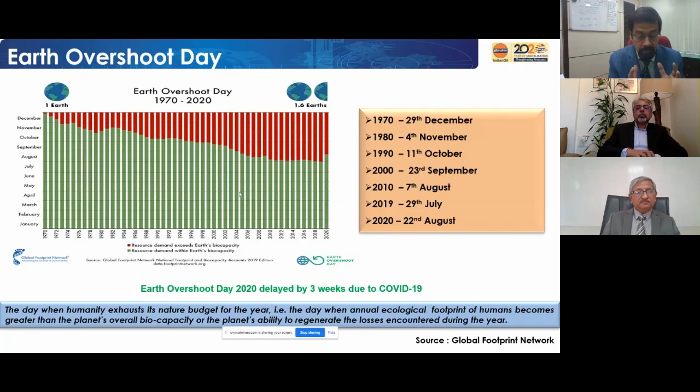Ultimately your cost exceeds your budget. So within a matter of say 21 days or 32 days, you spend everything. So for the last 1 week, you don't have anything to spend. So Earth is also having a capacity, and this resource demand exceeding Earth's biocapacity is the culmination of our development hunger, the thirst for getting more and more.

This is pushing us very hard. You can see, in 1970, if you take a calendar year, the whole resources from 1st January 1970 to 31st December 1970 - up to 29th December, Earth could support us. The remaining 2 days we have to borrow. Borrow means there is no other planet, so we have to exert this planet, we have to squeeze this planet.

Similarly, from 1980 it came up to 4th November, 1990 to 11th October, 2000 to 23rd September. See, it is shortening, that means we are consuming much more than what Earth can provide to us as mankind. An interesting thing happened after 2019, on 29th July - that means to survive, we need 1.6 times of an Earth to maintain our supplies, to maintain our livelihoods.

Now 2020, a very interesting thing happens - you all have the answers. This is the COVID diet, whatever happened during this period. Earth became totally silent, all activities got paused. So 29th July, which was last year, now it is 22nd August - that means it's almost 3 weeks' extension COVID has given.

That yes, you were living, otherwise you could have landed a month back, at the month of June, completely exhausted. But it has been pushed to 22nd August, that means we get some extra time to survive. So, with all the negatives of COVID, it's a big positive because Earth got to take some rest and recharge itself - the Mother Earth recharging - because the way we are torturing Mother Earth, it's an indication of that.

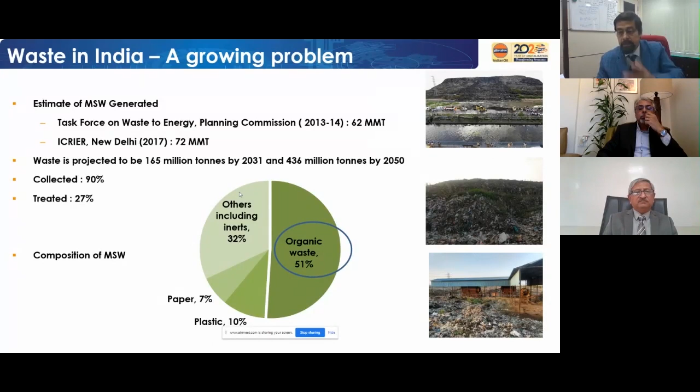You can see the heaps in the photo, which is the waste we are throwing. Every household, every individual is throwing waste every day.

Sewage treatment waste is another waste we are getting. Data shows total urban sewage generated is 36,000 million liters per day, and there are 816 sewage treatment plants in the country. We are treating around 23,000, and about 50% of the STPs have digesters for biogas. So these producing facilities are available, but a lot of work is needed to revive them and make this productively used.

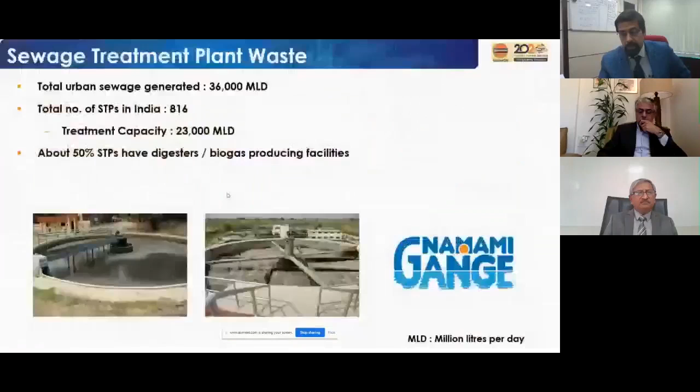Namami Gange is one area where they are working on this.

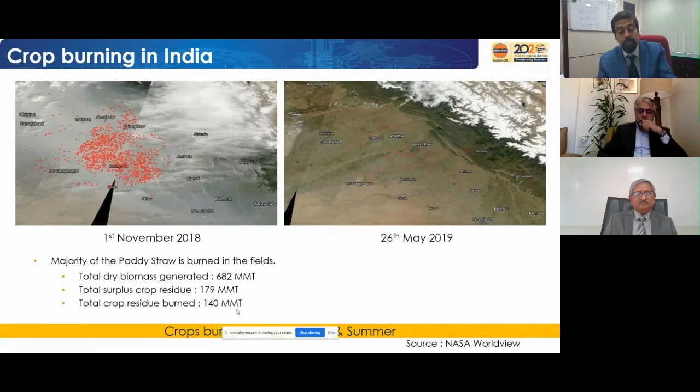Total dry biomass generated is 682 million metric tons. Surplus crop residues are 179 million metric tons, and out of that, 140 million metric tons are being burnt every year. Just imagine the amount of pollution coming out. Instead, if you can use it productively, you can really generate energy. We'll come to that later.

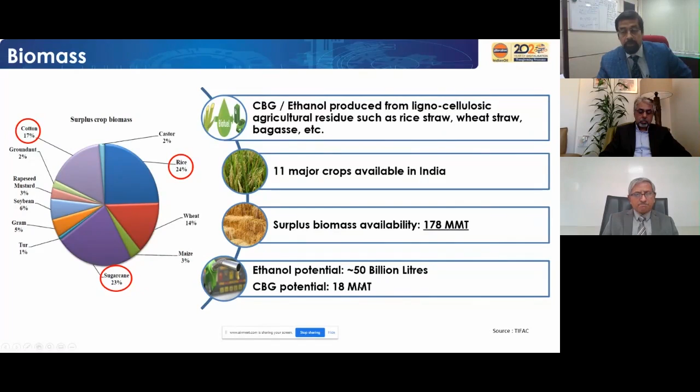Coming to option 1, we can see the compressed biogas option, which has become a very handy and path-breaking initiative by Government of India. Basically, this is methane mixed with carbon dioxide and H2S.

This contains CH4 at 50 to 60% level. Then this is enhanced, purified, and compressed. This compressed biogas contains methane over 96%. Then it is sold as automobile fuel or for industry - both ways this is possible.

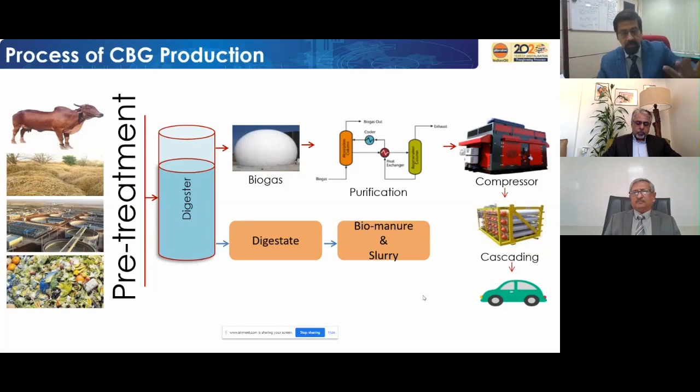And at the bottom, this is very important - the digestate, which is biomanure and slurry. This is also a very useful fertilizer, produced as a byproduct. So these three products - biomanure (solid), bioslurry (liquid), and compressed biogas - three products are available from this. The whole waste has been converted to valuable products.

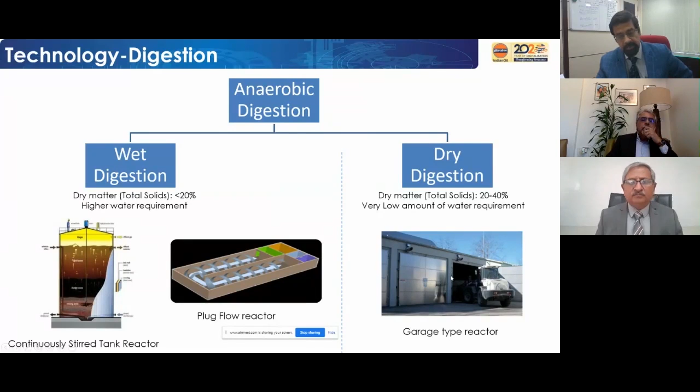This is the technology for digestion. Anaerobic digestion is taking place. There are wet digestions, two types: CSTR, which is continuous stirred tank reactor, and plug flow reactor. These two methods are widely used. Then dry digestion has a garage type reactor. This has limited use, but in Germany and other European countries this method is also applicable. These are the technologies for digestion.

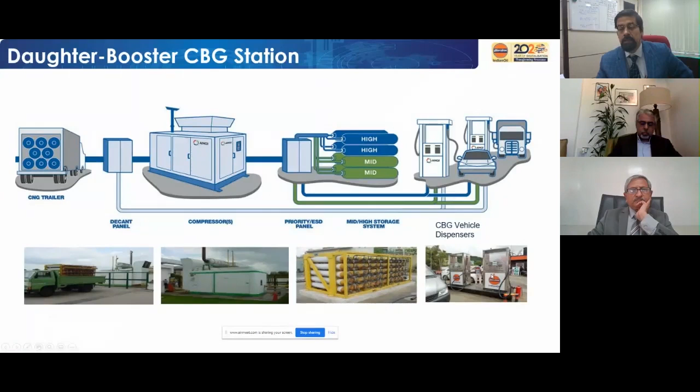If you see this happening in India, which we are starting now - on 1st October 2018 the SATAT program was launched, which stands for Sustainable Alternative Towards Affordable Transportation. Through this, CBG is being spread. We have a target of 5,000 such plants to come to the country. By 2023, these 5,000 plants will be producing 15 million metric tons of CBG and 50 million metric tons of biomanure.

We have fixed the price at 46 rupees per kg plus taxes, which is 5% GST now. This is up to March 2024. After that, this price becomes the floor price, so it becomes the minimum price, and for the next 5 years it remains the floor. Anything over and above this will be applicable based on the market situation at that time. So there is price visibility for 10 years, up to 2029, price has been guaranteed.

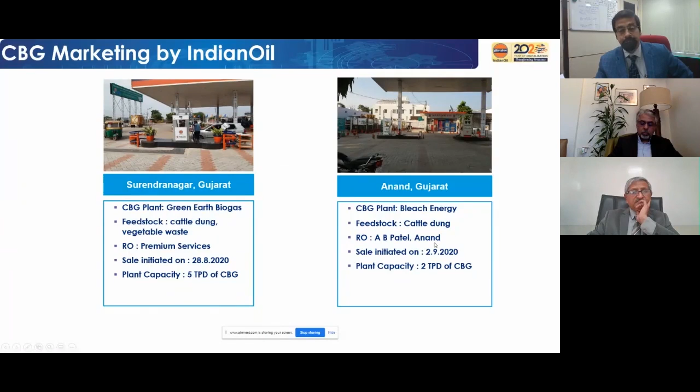So a total of 13 stations have already started, and we are also supplying 2 industrial customers from Namakkal - RK Steel, they are taking CBG and using it for their process.

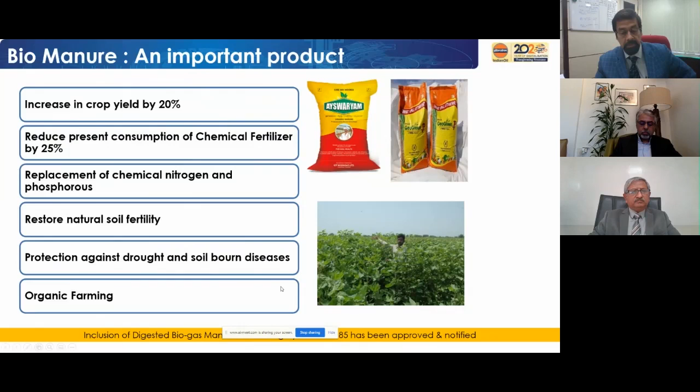This is a very important bio-manure. There is an increase in crop yield by 20%, and it reduces present consumption of chemical fertilizers by 25%, with replacement of chemical nitrogen. This is an organic fertilizer, and Ayswaryam is our brand from IoT Biogas. It has taken a very wide market and market acceptability, and it is leading to organic farming. Fermented organic manure has been included in the fertilizer control order, so this can be marketed without any hitch now.

Another technology option we are trying is waste to energy, through gasification. Today's seminar is on gasification. We are actively working with a technology provider who will handle fresh MSW and also legacy waste, and convert it through the route of syngas. From the syngas we will be able to produce power generation, hydrogen separation, chemicals, and also liquid fuels like ethanol. We have started a demo plant construction in Delhi, and we'll be scaling up once the demo is completed.

Used cooking oil to biodiesel is another area where we are actively working. Every household uses cooking oil, but generally households throw away very limited quantity. In hotels and food business operators like Haldiram, McDonald's, and other units and big hotels, there are restrictions on throwing off used cooking oil after certain use. After second and third frying, we are not supposed to use that cooking oil because it becomes carcinogenic and is not good for health.

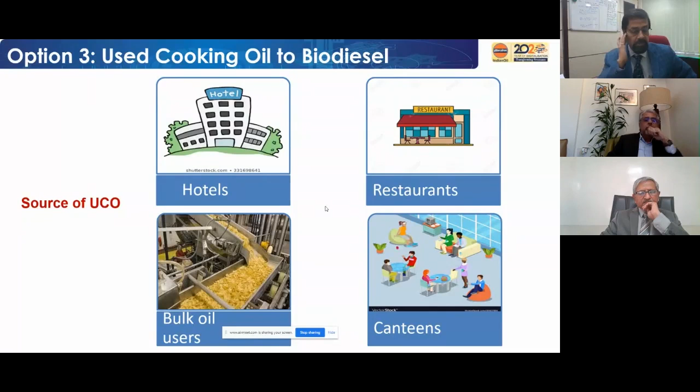FSSAI has stipulated a 25% total polar compound limitation for used cooking oil. If it is more than that, you are not supposed to use it. So that used cooking oil is being collected, aggregated, and used for production of biodiesel. We have been given an EOI, expression of interest, already. We started this in 2019 on the 10th of August, which was World Biofuel Day, and the Honorable Minister inaugurated this program. This is also going on in parallel, and so far we have been getting very good responses from states.

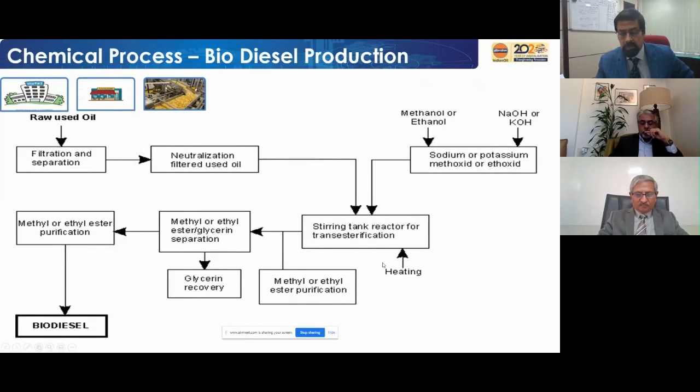This is the process of biodiesel production. It is otherwise waste, because either it goes into a parallel food chain or it comes to disposal through drains and local areas. I consider it a very serious waste, which can be converted for value addition and produce biodiesel, with up to 7% biodiesel blending in HSD carried out in the country. We are a diesel economy, so just as ethanol is blended in petrol to save petrol, biodiesel blending in HSD will give a big boost for replacement of fossil fuel with this type of waste fuel, and will ultimately help reduce imports for this country.

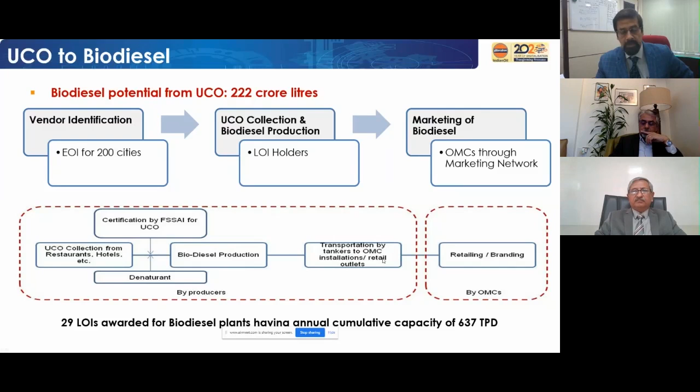So far 29 LOIs have been awarded, with a cumulative capacity of 637 tons per day production of biodiesel. This is the flow chart: 200 cities have been identified, then EOIs through LOIs are placed, and OMCs are taking 100% offtake at a guaranteed price, and we are selling through our marketing network. This is the model, and FSSAI is actively supporting it. Every state has formed a committee. This will also give a boost because the collection and aggregation challenge is already there, and once that logistics is developed, things will move faster. That is the target we are trying to achieve.

Fourth option is cellulosic ethanol, which is second generation ethanol. Here also the biomass, like paddy straw and other biomasses, is being used through pretreatment and hydrolysis, and then fermentation through distillation we can make this cellulosic ethanol. This can also be done through gasification or syngas, using the same process to make ethanol. So we are trying both technologies.

We have our plant at Panipat coming up, around 50% of the work has already been completed. We're expecting by end of next year, 2021, to get this second generation ethanol plant in the country, which will convert 700 tons per day of paddy straw, which is 2.2 lakh tons per annum, into ethanol. As for the gasification route, we are trying this also, and in future we have a plan to convert syngas into ethanol.

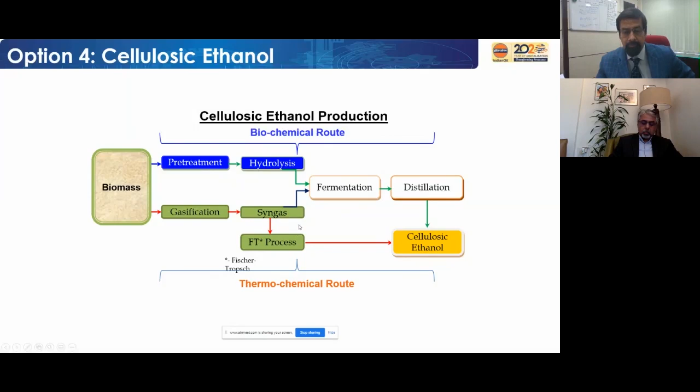Pet coke gasification is one more area our R&D is actively working on. At our R&D center, we have already developed the gasification concept employing pyrolysis and low temperature moving bed fluid bed gasification system. This process is capable of handling various other feedstocks like biomass and its derivatives, lignin, and black liquor, which are major areas that can be converted and add lots of value. This methodology enables segregation of various feedstock depending upon their reactivity and ash content, making the process energy efficient. By processing high ash Indian coal in the low temperature first stage, ash rejection takes place at much lower temperature.

People from a technological background can understand this. This is an area where we are working very seriously because we generate lots of pet coke in our refinery. We got a patent from US, Europe, and India, and a 2 TPD demonstration plant is being set up with our R&D.

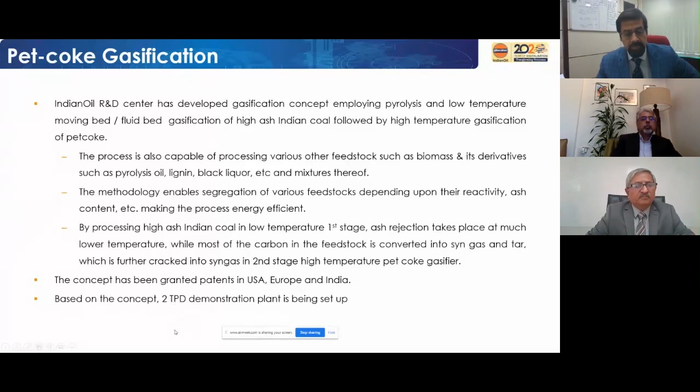So overall, what is the intelligent use of waste? Prima facie, waste is not a waste. I always say there will be a time when you have to keep waste under lock and key, because the market will demand waste and it will have superior value. So that will become an asset for you, and there the circular economy concept comes in.

We have water, we have biomass, we have feedstock. Now we have to ensure quality environment, economic prosperity, and social equity. This is possible with this bio-route: biogas, bioethanol, biofuel, bioenergy. Looking forward to a green India, with all the waste, which is a challenge today, having productive use and enabling self-reliance. Thank you very much, that's all from my side so far.

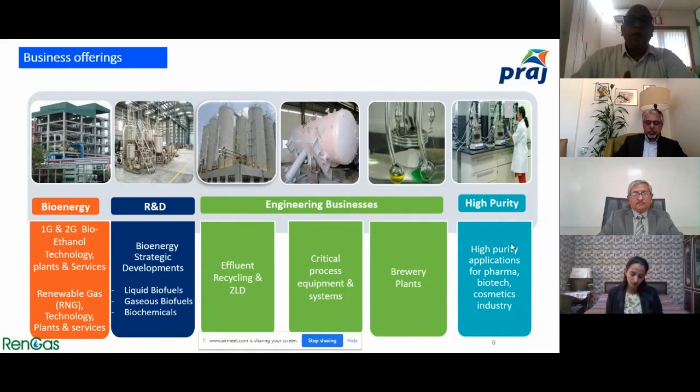We have various business lines, but of course, bioenergy and the research focus around bioenergy plants is the main theme that we have. The rest comprise effluent recycling, critical process. We have a global leadership in biofuels, ethanol and renewable gas plants, and we do everything from feed audit studies up to complete construction of plants, commissioning, and project management along with post services.

This is our R&D center, which is one of the unique ones dedicated to bioenergy, especially using various waste streams and converting them into useful biofuels. That's the theme behind our R&D.

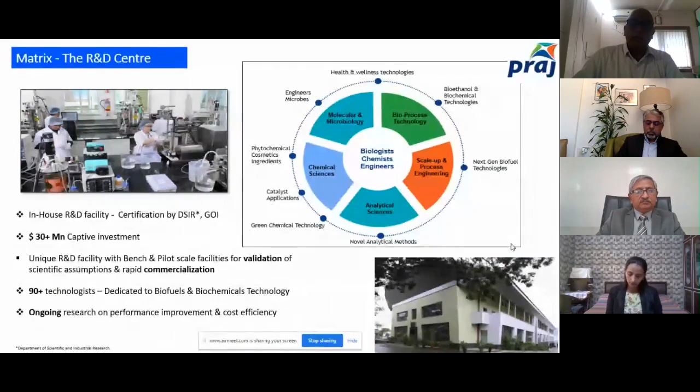Coming to biofuels, which we feel is key to sustainability. If we look at the major challenge today, it's petrol and diesel. Let's be very specific about it. They are the major contributors to carbon and GHG emissions, causing health challenges across the world. Therefore,

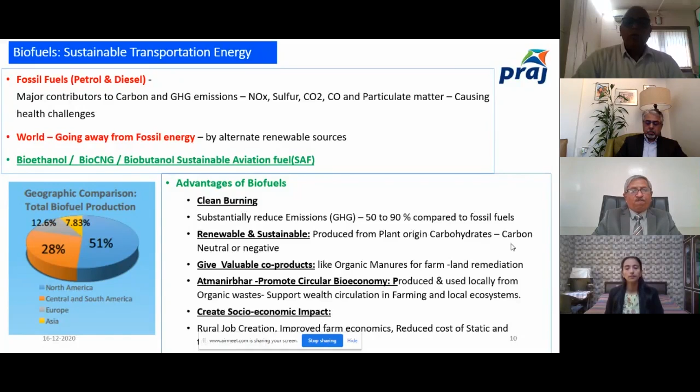every sector, be it vehicle manufacturers or oil companies, wants to move away from it, preferably to much less hazardous alternate renewable sources. These typically comprise bioethanol, bio-CNG, as Mr. Gupta also spoke extensively, and biobutanol, which is a new concept coming up for aviation fuel, SAF, because they are clean burning and renewable. They also give valuable co-products like organic manures. And in India, they are key to Atmanirbhar Bharat, promoting circular bioeconomy as well as having a very good socio-economic impact. So this is the importance of it.

Very quickly, coming to the plan of the Ministry of Petroleum and Natural Gas in coordination with the Ministry of Agriculture. It's very straightforward: blending 20% bioethanol into petrol by 2030, and replacing 15 million metric tons of CNG with bio-CNG or CBG by '24. Very well-defined, lucid and clear targets.

What this is going to do is save almost 10% of our forex oil bill, pumping that wealth back into farmers and the rural economy.

That's critical. And on the other hand, this connects to utilizing gainfully and sustainably the organic waste produced from the agricultural sector like straws, the agro-industrial sector like sugar mill press muds and distillery spent wash, and city waste we all generate through MSW, food waste, etc. If we put all these together and use them gainfully in a systematic way, this target is very easily achievable. That is the key significance of using all this so-called waste.

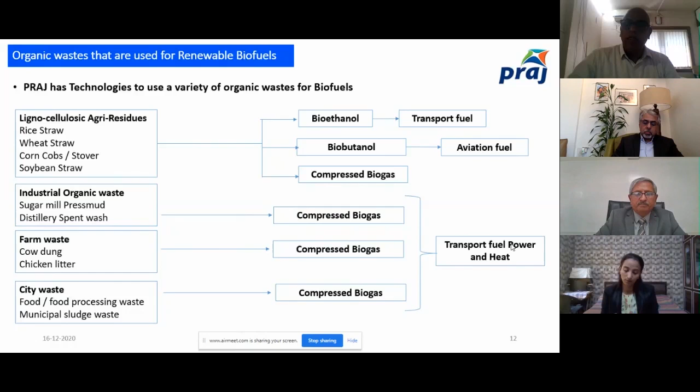So when we quickly look at agri-residues, they are quite abundant, almost to the tune of 150 to 200 million metric tons. These are some of the types - they are cellulosic in nature and need some kind of pre-treatment to extract the sugars. They can be made available around the year because luckily India has a very good combination of 3 seasons for plantations.

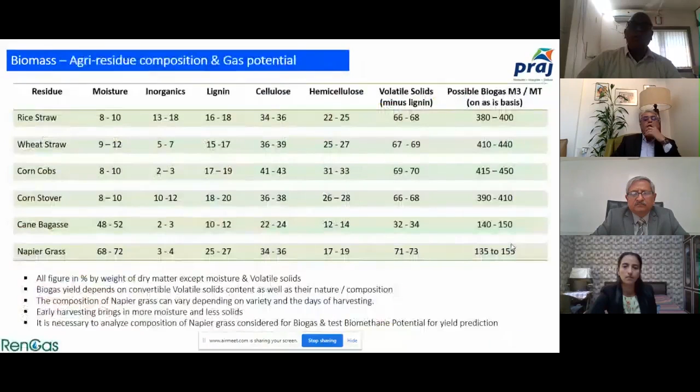So all the time from our farms, this resource keeps on coming as available resource to convert into energy. When we look at their composition, rice straw, a metric ton of rice straw has a potential to give almost 400 cubic meters of gas. And as you can see, most of the other materials are in a similar range.

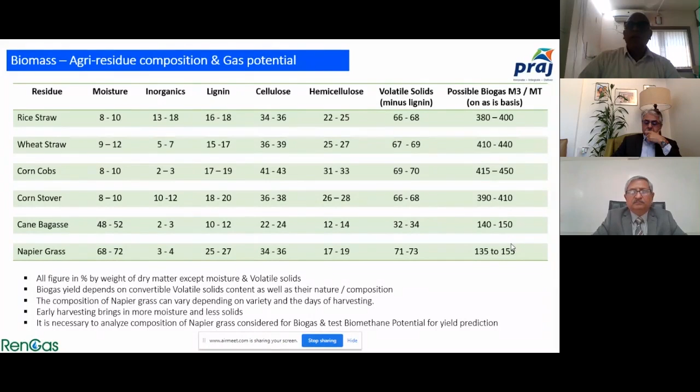This translates into about 150 kilograms of compressed biogas per metric ton, which is a very attractive and viable conversion. What it means is half of the organic matter contained in these natural resources very efficiently gets converted into clean burning renewable bioenergy like biomethane. And that's the significance of it.

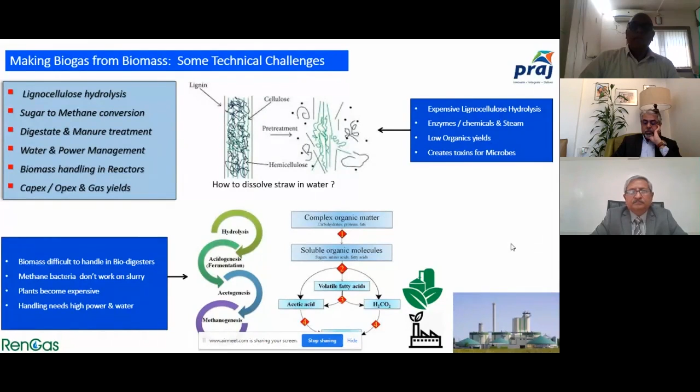Because there are certain technical challenges, Praj as well as IOCL R&D, everybody is working very strongly to resolve them. There are processes which we have developed which use enzymes or microbes to extract very efficiently the organic volatile solids and convert them.

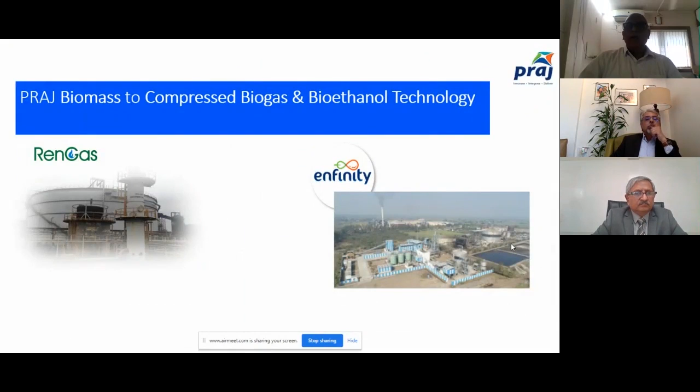Very quickly looking at the two technologies for two vital biofuels: biogas, compressed biogas, and bioethanol technology from various organic wastes.

For waste to CBG plants, we have developed an innovative microbial technology which solves the first challenge of lignocellulosic hydrolysis. As pictorially represented here, a simple microbial pretreatment will dissolve the lignin and take away the cellulose and hemicellulose from this waste, making it available for biomethane bacteria to produce.

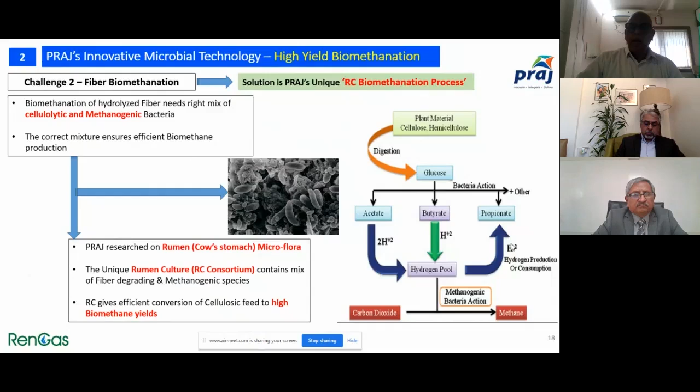The second challenge is how do we convert these volatile solids into biomethane? This is where we have actively worked on rumen culture from cow stomach, where they are able to degrade fiber and produce methane, and that today is available as a commercial solution through our plants. These two combined together can give a high yield of biomethane from this waste.

A third important point is the critical value-adding manure, which is in the form of both solid manure and liquid manure. This has been notified in the fertilizer control order by the Ministry of Agriculture, and it is a very gainful manure replacing use of chemical fertilizers. We also have NOCA certification available.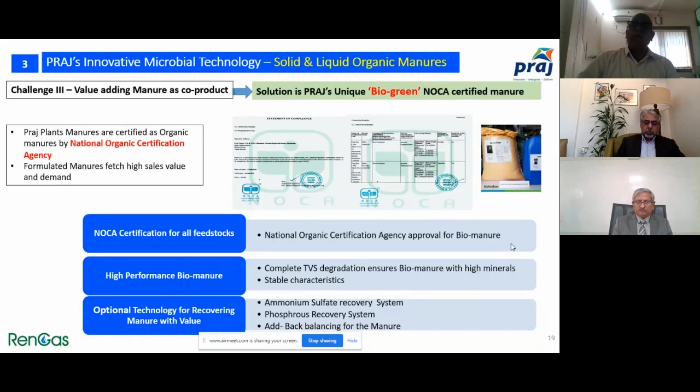Coming to the technology of making efficient biogas, we have collaborated with a US-based company called DVO, and they have a plug flow design system buried under the ground or soil, which works without any stoppage or maintenance for decades together because of its construction and robustness.

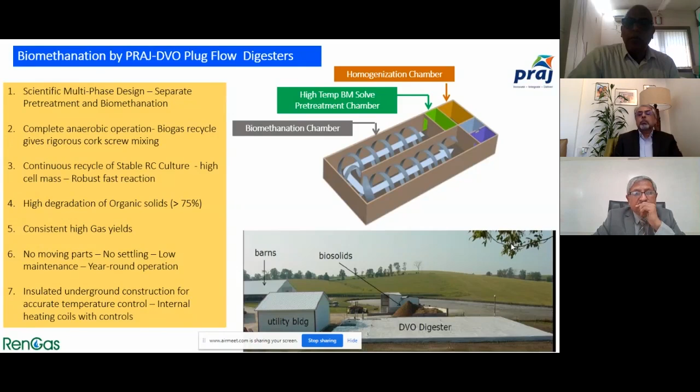We are currently installing 2 plants which would supply biogas or compressed CBG to IOCL. One is coming up in Uttar Pradesh, the other one is coming up in Karnataka, and we are going to do multiple such plants which will be using organic waste.

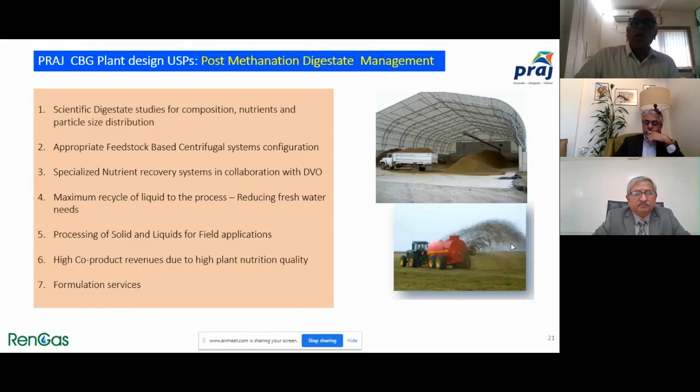The manures are well approved both in Europe as well as in the US, and these are improving the yields and also the humus, making the farming soils rich and not allowing them to go alkaline and go out of farming cycles.

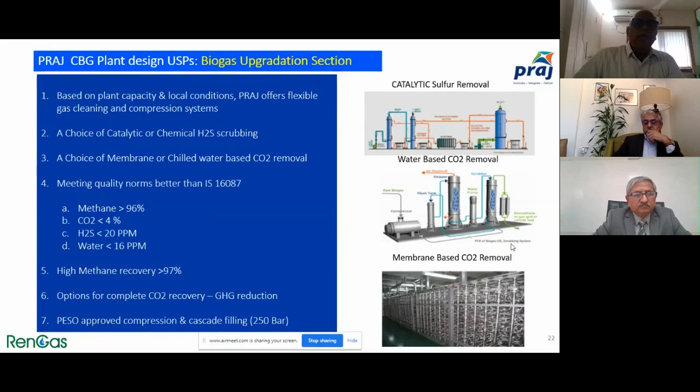Biogas needs to be upgraded to CBG, and we also have commercial solutions there, either membrane systems to remove the carbon dioxide or water-based systems, as well as removing the sulfur. So the desired quality of CBG expected by the oil companies, we can guarantee having methane above 96% and the other impurities well within the limit.

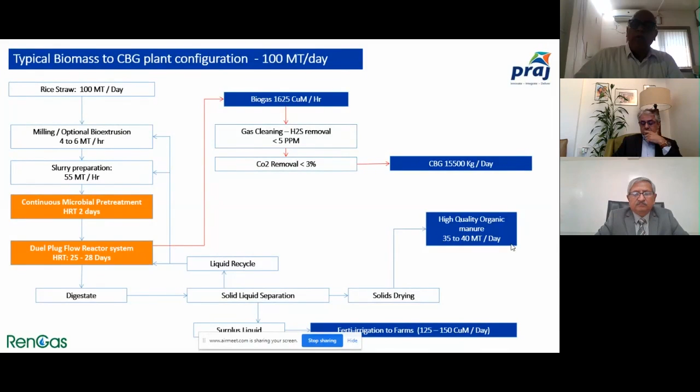Typically, when we look at using rice straw as one of the organic wastes, if we use 100 tons, it will give almost 15 tons of compressed biogas every day, around 35 to 40 metric tons of high quality organic manure as a co-product, and about 125 cubic meters of fertigation, which can go to the farms nearby. So this is one technology of compressed biogas which can utilize a variety of organic solid waste.

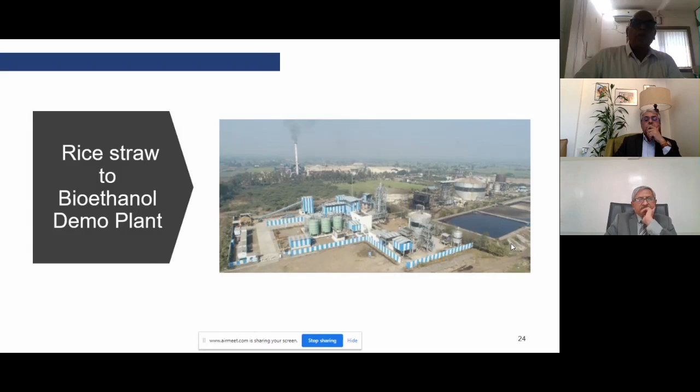Coming to the other biofuel, which is bioethanol, Praj has also done considerable work on rice straw as well as other feedstocks to make bioethanol. This technology is called Enfinity, and we are installing commercial plants now.

This is a typical block diagram through which the biomass is processed through cleaning, size reduction, pre-treatment, hydrolysis, fermentation, and then recovery of ethanol. Also, the lignosulfonates can go to the boiler or to bitumen, and by evaporation, we can produce additional products.

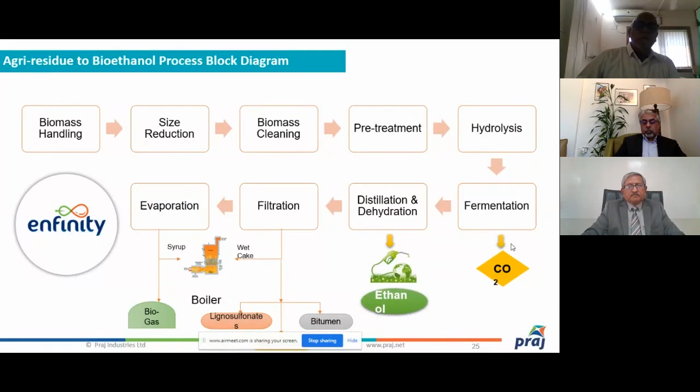Typically, corn cob and the same feedstocks like CBG can also be used to produce ethanol, and they differ depending on the cellulosic contents. The yield of ethanol can vary.

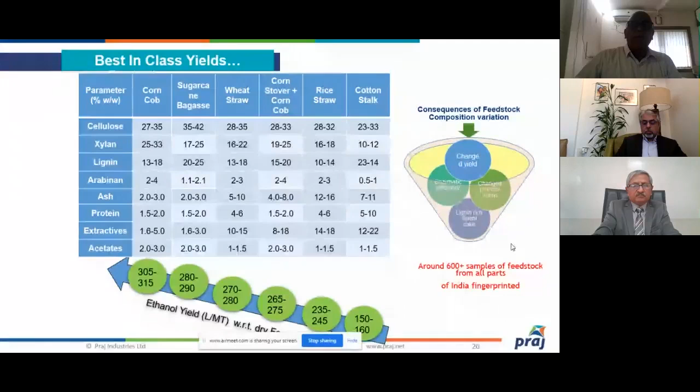By using biofuels and producing them through organic waste is critical. These are the key points we would like to say. A 20% ethanol blend and 15 million metric tons of CBG production from all this vital gold waste—I would like to call it really gold—can save our country almost 80,000 crores of foreign exchange, which is roughly 10% of our crude oil import bill.

Sounds very dramatic, but it is not. If we all work towards this goal along with the ministry, I'm sure in the next 5 to 7 years this is achievable.

Now, where does this wealth go? It goes into the circular bioeconomy, into the agro-industrial farming economy, and helps rural skill and job creation, improving farmer income, reducing pollution, as well as making us Atmanirbhar through these routes.

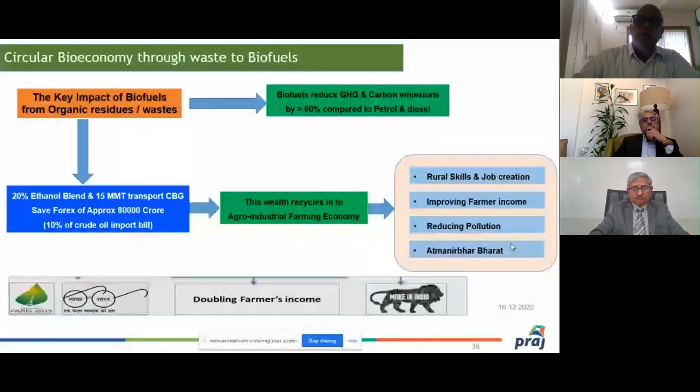At the same time, the commitment we have as a nation to the Paris Climate Summit, we will definitely be reaching towards that. So it is achieving multiple objectives gainfully from properly processing the organic solid waste coming from farms, from cities, and from agro-industry. If this network is properly established, I think there is considerable economic and social benefit out of this.

So these are some thoughts on behalf of Praj I wanted to share with you. Thank you so much.

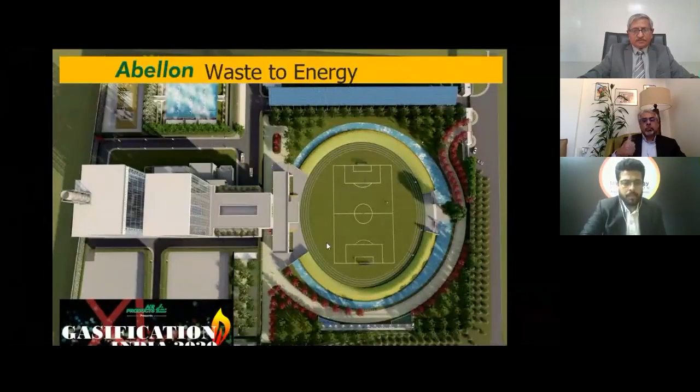First of all, thank you very much to the audience and also the organizers for giving an opportunity to present what Abellon is all about in the waste energy space. What you can see is one of the projects coming up in Ahmedabad as one of the model projects for waste to energy. I would like to talk about something more in detail about Abellon and the project we are doing.

If we just talk about a little overview of Abellon Group, we are very happy to say that we are a pioneer in the waste to energy space in India. We have been instrumental and working very closely with the policy makers and the government for defining and designing the waste to energy rules and policies. We have a very strong proven track record and unique R&D technology and development skills at our end.

Predominantly, we talk about businesses which have a triple bottom line approach. That means environmental protection technologies, which also have economic progress and social development. So most of our initiatives that we are currently strong in have all these things as a very strong USP.

We have 3 business lines: renewable power, which means bio-MSW. We have a dedicated municipal solid waste plant with a city waste plant, solar power generations, and combined heat and power models and projects.

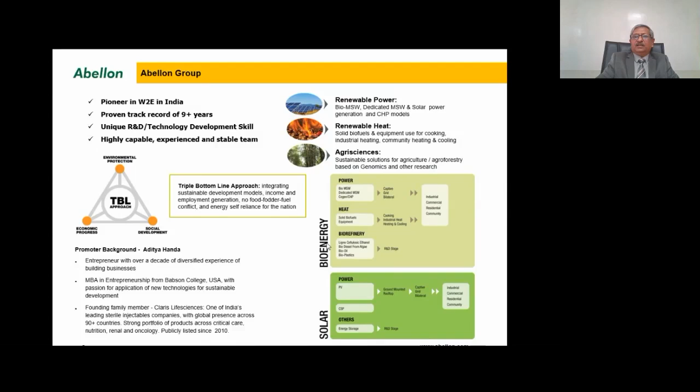Another business line is renewable heat, in which solid biofuels and equipment are used for cooking and industries and in agri-science. So if you see, there are business lines...

...energy. We have solar energy projects together with very innovative projects of the government of Gujarat connected with farmers. Also waste to energy projects in 2 models, as I said—one with a dedicated city waste/municipal solid waste project, and others are biomass power together with RDF co-firing, where we can use any source of biomass as a power source.

Together with this, we have biomass renewable heat projects—biomass pellet projects, 2 projects in Gujarat, with 2 more coming up in other parts of the country. To use that biomass pellet in the right way, we have pellet-based applications and appliances. You can see a very large spectrum in the development verticals, because it is supported by our strong R&D team.

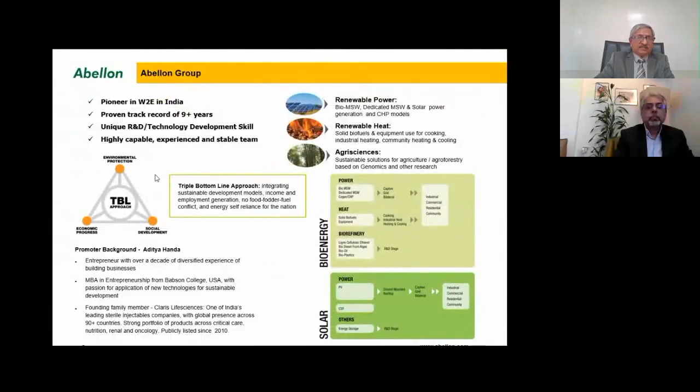It is biomass characterization and biomass collection systems that are very critical to biomass projects and energy farming, as we said in the previous slides. This is a waste to energy project at Ahmedabad. This is the Abellon group, which I talked about previously, and these are the self-sustaining and evolving business models on which Abellon is working.

There are, as I said, 2 business verticals of renewable power and renewable heat, and there are 3 R&D verticals. This is very strong in biomass resources. One spectrum is technology development, and another is renewable fuel uses.

These are certain key milestones in the journey so far. We have been working very strongly in the biomass spectrum since 2006, 2008, '11, '12, all these successful milestones, as you can see. And these are certain awards that we have received. One of the important awards is the Zayed Future Energy Prize in 2014, which is considered an Oscar in the energy area.

Ashden Award 2011 was awarded directly by Prince Charles to us. There are few areas in which we have worked, like the African Business Awards in 2015 because of our project in Ghana and various others. Same way, we are working very strongly in waste to energy and biomass.

R&D is our DNA, since our group primarily belonged to the pharmaceutical industry in the beginning, so R&D is something we are very strong in. We have more than 20, today almost more than 28 patents. We have various international publications, working in global collaborations with USA and Germany and other parts of the world with universities for collaborative research projects.

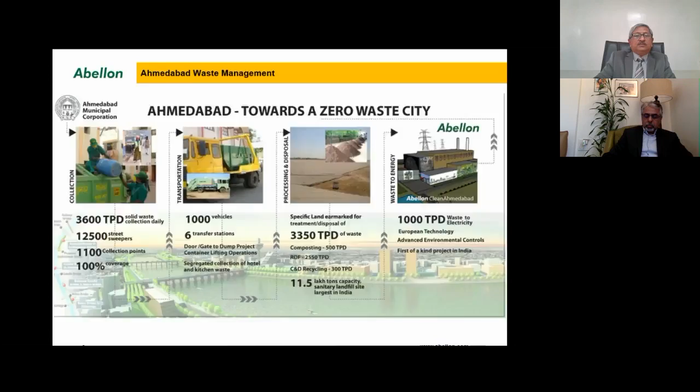So we ran through various due diligence processes, trying to understand very deeply how the waste is, since it will be different from different parts of the city. Every city has a different socio-economic profile, and depending on that profiling and urbanization, the waste will be different. Same way the collection method and transportation are different, so the composition of the waste has to be understood very deeply.

At the same time, once the waste is understood, we also have to understand what technology is relevant to the local waste - considering the global precedents and references available, what technology partners are available, and the operation and maintenance requirements, scalability, environmental controls and compliances, which are all very important.

So we did all this due diligence together, and then finally we decided what the appropriate technology is, what the key technology partner can be, what can be the scope, and what can be the balance of plant and partner type. Having understood this, we tried to understand the waste very deeply.

We did a sampling of more than 150 trucks, more than 34 tons of truck samples were selected. Out of that, we derived more than 1,400 plus samples to conduct R&D, spent more than 2,000 hours, and covered almost 6 zones. The type of waste we studied was fresh municipal solid waste as well as legacy waste already at the dump site, and also residential and commercial waste. To understand the entire spectrum and type of waste, we did this waste characterization as part of our learning process. So this is how it was done.

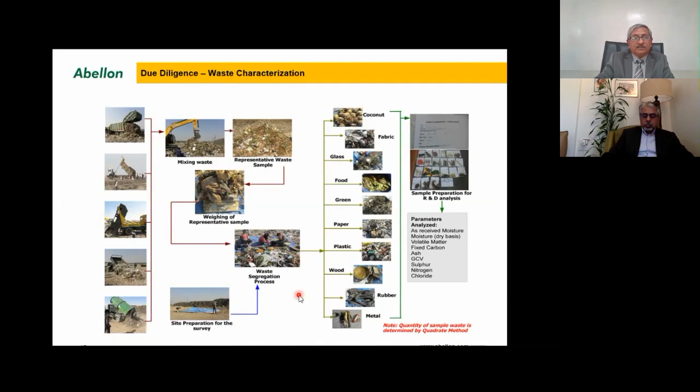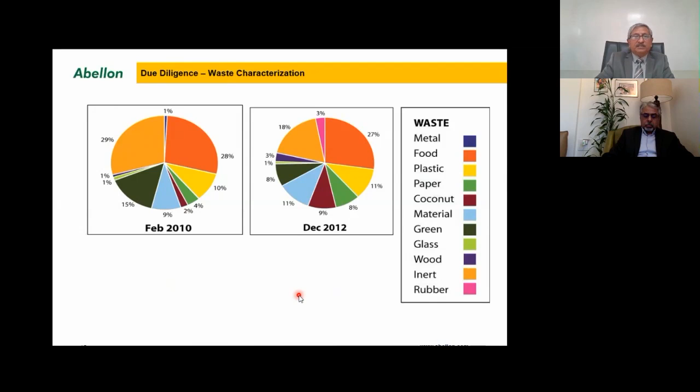We also studied samples across time, right from 2010, and various compositions in terms of metal, food, plastic, or whatever it is, and what percentage it is. There are also 4 different types of analysis in terms of parameters: what is the physical composition, what can be the moisture composition, how much ash is there, and finally what is the calorific value. This calorific value is of utmost importance for all of us, because the project is basically to convert that calorific value into usable energy. So across the spectrum, various types of material, we created various databases and ran through various database analyses to understand this waste. It was a mammoth task we undertook before starting this project.

This is how it is being transferred. As I said, Ahmedabad fortunately has an early mover advantage with transfer station infrastructure already in place by the municipal corporations. So at different places the waste is collected door to door and brought to the stations, and from there it is delivered to the doorstep of our waste to energy project.

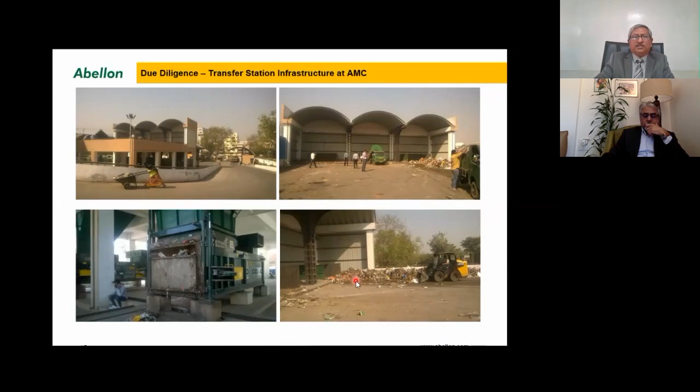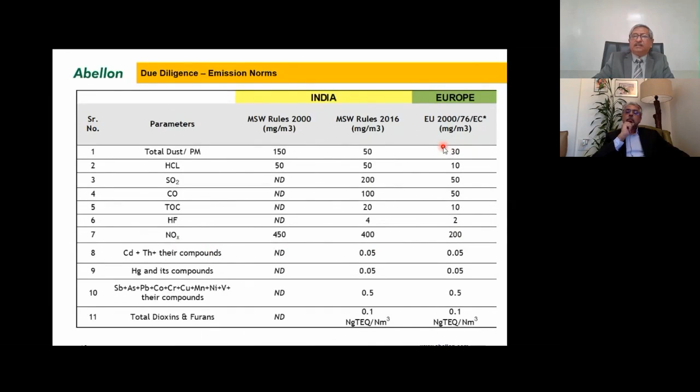A very important part was emission norms due diligence, because we all understand that all projects across India have hit this particular subject very hard. So we studied the MSW rules 2000 and 2016, the latest rule, and the European norms. Our project is going to comply with those European norms, which are in some areas even stricter, and in some places equivalent, like for dioxins and furans, equivalent to European norms. At the same time, we tried to implement a technology which can comply with the European norms, the EU 2000 emission norms.

We also studied plants and vendors at various places across the world, more than 35 visits to 35 places. Teams were sent to different places to understand the technology and the waste. The technology we finalized was incineration technology, proven globally, with more than 1,000 plants across the world. The technology partner we selected was Keppel Seghers, from Europe, a multi-billion-dollar group in Singapore, which has set up more than 100 waste to energy projects in 25 countries, with capacity ranges from 500 tons to 3,000 tons.

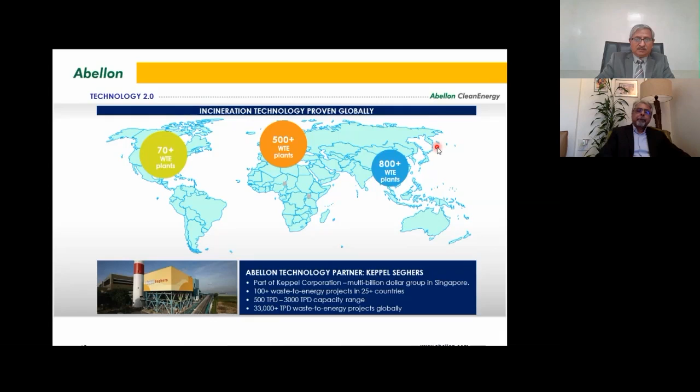So we understood that this is a group who can help us and be with us in the entire journey of our growth and setting up various plants at various places. They already have, as I said, set up plants at various places in the world, and this is the type of technology which they use.

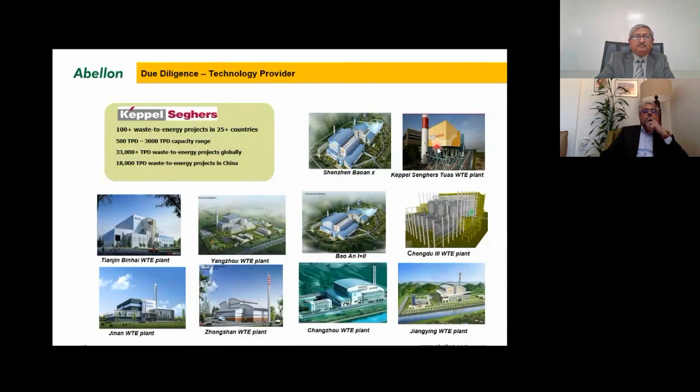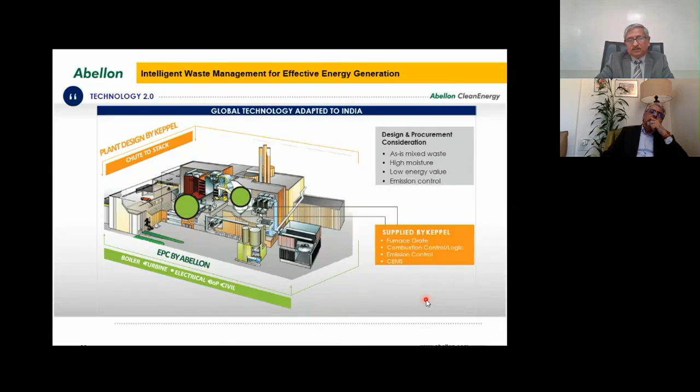So what we did is a complete plant. The EPC is done by our own group. We have our own strong team of EPC who can work on the technology supplied by the technology partner. So we worked on as-is mixed waste with high moisture, low energy value, and emission control being taken care of correctly. To do that, this is a typical plant design.

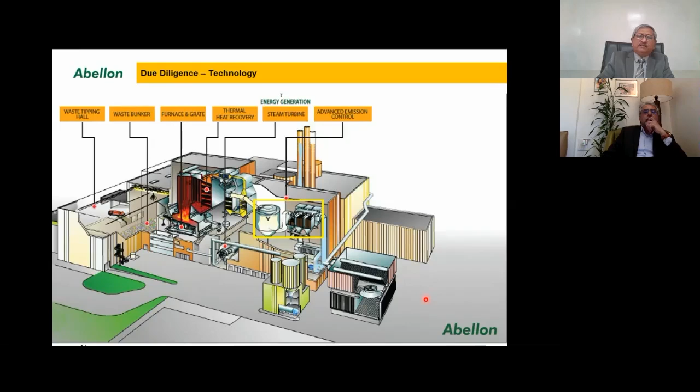I will try to see if I can run this animation. Can you see the animation? No, animation can't play, okay fine. So this is a plant wherein waste comes directly from the corporation and is unloaded here.

It is a human intervention free plant wherein no human intervention is required for handling of the waste. It is fed into the waste bunker, where the bunker will store the waste for almost 3 days. More than 3,000 tons of waste can be stored over here.

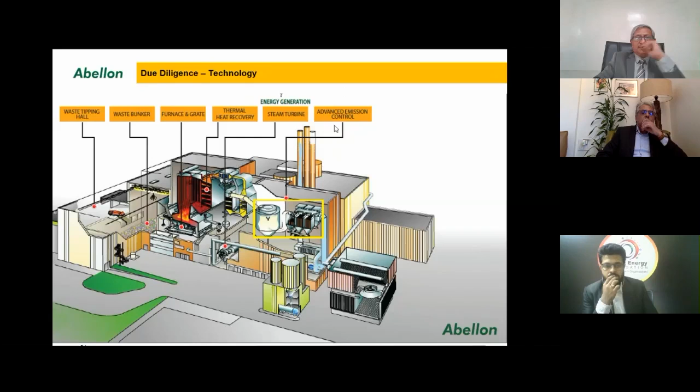Then we have a furnace and a thermal heat recovery system which will produce steam that goes to the steam turbine. The flue gases will run through the advanced emission control systems, passing through this before going to the chimney.

All the particular places into this grate have automatic robotic systems. It has intelligent artificial intelligence systems to understand and see how much temperature is there, and it is able to control the temperature at various parts of the grate with reference to the type of waste inside the process.

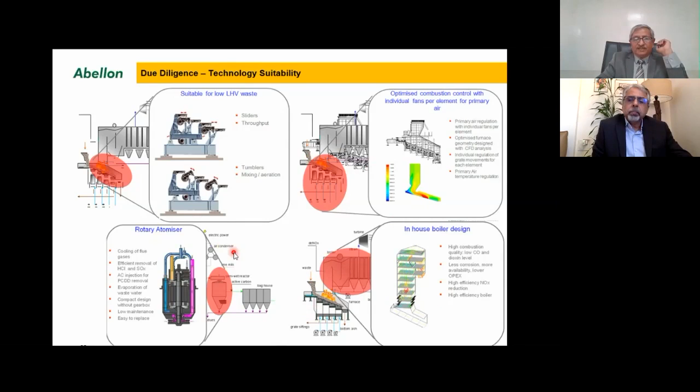Then this boiler is also designed in-house together with the technology supplier, and these flue gases will go through this rotary atomizer of the emission control systems.

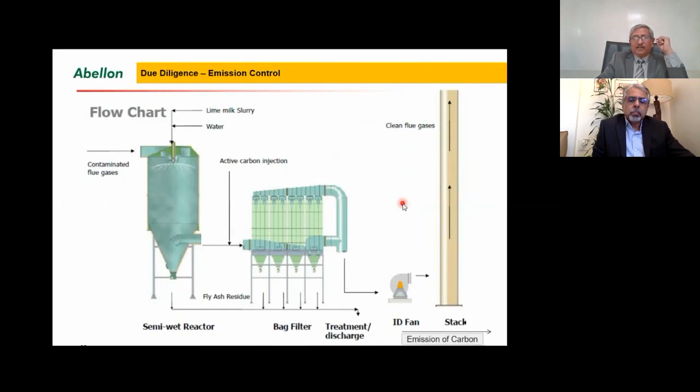Now, thereafter, we did not get satisfied. We also got into further planning, and that is, we tried to cover that we can capture the carbon dioxide also. So now, after new initiatives by Government of India under the Ministry of Petroleum and Natural Gas and the Honorable Minister, we have got very strong interest into carbon capture, utilization and storage technologies. So we tried to implement this.

So now what is proposed over here? What we are going to propose is that we are proposing a carbon capture and storage unit before this flue gas goes out of the stack.

So then we have to see where the CO2, the captured carbon, can be utilized. Fortunately, by grace of God and the advantageous location of Ahmedabad, we realized that there is a possibility of usage of the carbon dioxide by ONGC to use in EOR application. So this is how it is being used.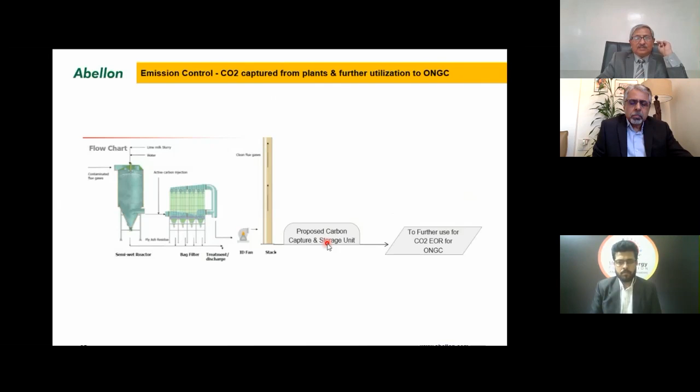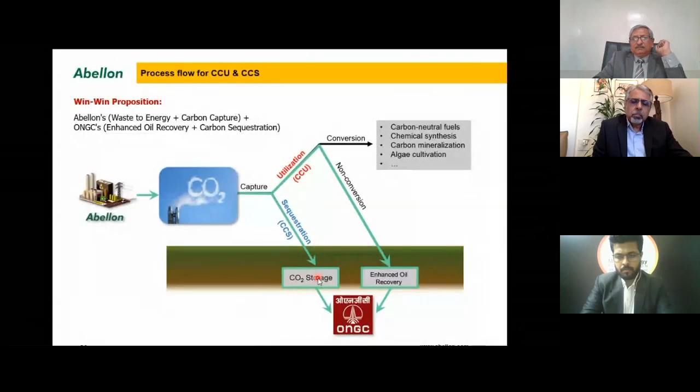So Abellon becomes a waste to energy plus carbon capture plus enhanced oil recovery and carbon sequestration project. That is a first of its kind project in India. That means from this project, after using the municipal solid waste for power generation, whatever flue gas is going out, we are capturing the carbon dioxide over here, and that carbon dioxide will be utilized by ONGC for storage beneath the earth for enhanced oil recovery.

How is it being done? This is a typical system wherein once the carbon is separated, it is injected at a wellhead into the ONGC oil fields, which will help enhance oil recoveries from depleted or aging oil wells which are producing oil today. It helps two ways: one, it will capture the carbon and sequester it underneath; at the same time, it will help oil producers get more oil from the aging and depleting oil fields. Fortunately, we are very close to the oil fields of ONGC.

So we got a tie-up and we are getting into further understanding. So the general advantages, the benefits of this waste to energy plus CCUS project, is clean electricity production because it has minimal carbon footprint. It has enhanced oil recovery because the oil related royalty will be increased, and at the same time, our oil dependency from import will be reduced substantially.

It will also be a permanent storage of CO2 in an oil well. This technology is very well proven, being used by all countries outside India significantly since many years. So it is a mature and proven technology. ONGC is looking at a possibility to use it, and we have come as a partner to them.

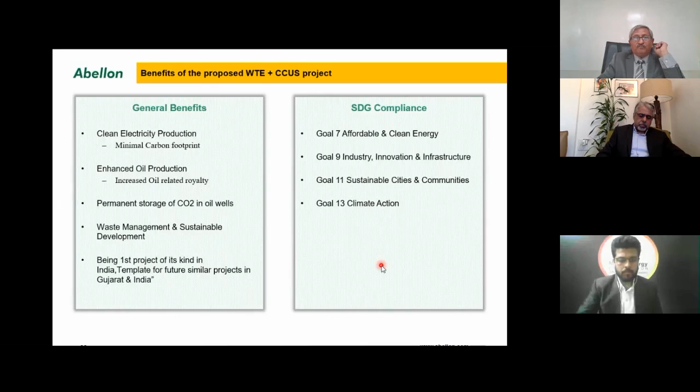So this is a 15 megawatt project which will be able to capture 100,000 tons of CO2 per year, that's 1 lakh tons of carbon dioxide per year. It's a significant number, and this CO2 will be utilized by an ONGC field nearby Kalol, around 35 kilometers from this place.

We are proud of such a project to get associated with ONGC. We are also in talks for other projects coming up in other places in Gujarat, like Baroda and Rajkot, and things are under consideration. So this is a salient feature.

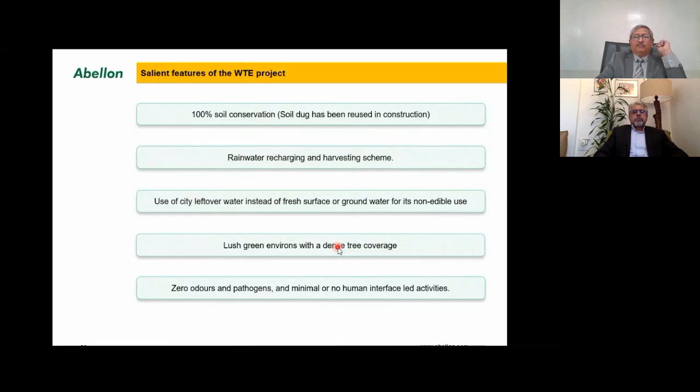If you see, it is 100% soil conservation. We have taken care of the project from the beginning, at the conceptualization stage, such that not even 1 kg of soil has been taken out, and not 1 kg of soil has been used outside the boundary. We have also taken care of rainwater harvesting and recharging. The water being used is the city leftover water instead of fresh surface groundwater.

That is very typical, and probably the first project of its kind being worked out in India. That means the water being used is city leftover water from the STP, the sewage treatment plant.

In the campus, we have created a lush green environment with dense tree coverage - more than 10,000 trees have been planted. When we got the land it was plain barren land, and today you can see more than 10,000 trees are there.

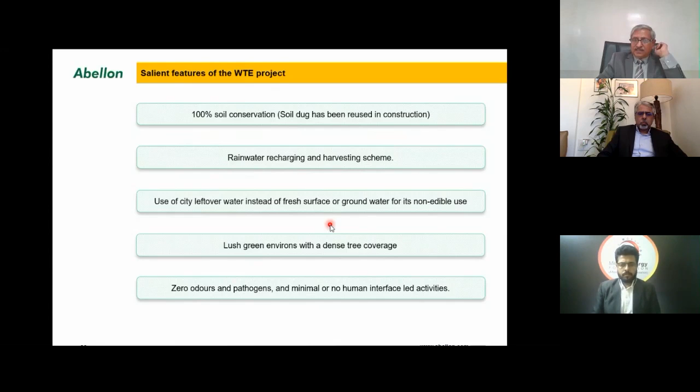So we are trying to bring it to a zero odour, zero pathogen, and minimal or no human intervention into the entire plant activity. So it is a salient feature.

We are creating this campus not only as a waste to energy plant, but as a waste to energy campus, envisaged as an integral part of all activities and the life of the community within which the plant is located. So we are going to invite visitors from different sections of society to see, understand, and take part in art and photography.

We have kept various areas available for people to come and enjoy, making it a kind of picnic or visiting place. There is also guidance and support to promote green initiatives within the campus and surrounding area.

So there are dedicated nurseries maintaining inventory for native tree saplings, giving to and inviting people from nearby and other places. There is also space for display and trial of green and clean tech products and solutions, like electrical vehicles and solar systems. Within the plant itself, we have got a solar tunnel in which the solar plant is also implemented.

Various visuals, art exhibitions, music, dance trials, recitals, celebrations, festivals - all that we are going to create. All the outdoor sports activities such as football, cricket, volleyball are also being organized. We are going to give this ground for free use to municipal corporation schools that don't have enough space for sports activities, along with lighting-based elements and various attracting activities, so that it becomes an experience rather than just a visit to a stand.

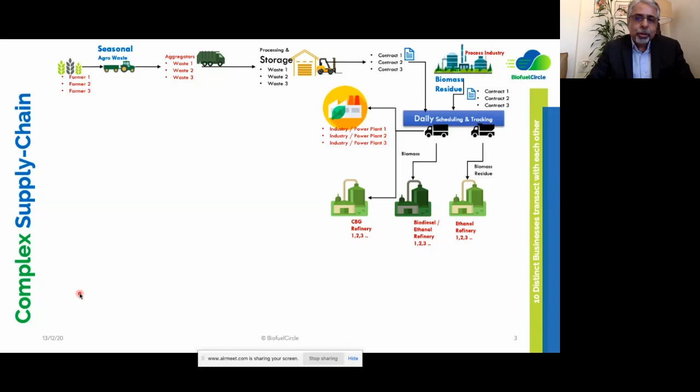What's extremely important from a supply chain point of view to understand here is that the crop which is generated on a seasonal basis is required on a daily basis. So the complexity of organizing daily transport, scheduling it, making sure that industrial production is not impacted due to unavailability of the biomass at any point in time is a critical challenge for efficient working and also viability of some of the bioenergy plants. What we have seen is that a large number of projects do see viability gap on account of the fact that they can't run 365 days in a year.

Or even 300 days in a year. So one important problem to solve in this supply chain is to make it reliable and to make it available daily for 365 days in a year for industrial consumption.

While this seems to be what I would call as a relatively matured part of the bioenergy supply chain, the developing part of bioenergy supply chain is essentially around the produce of the bioenergy plants, which could either be compressed biogas or ethanol. I think the last point where I probably could not be heard is the evolving part of the supply chain.

And this evolving part of the supply chain is essentially coming out of the new bioproducts like bioethanol and biogas, and setting up a reliable supply chain for these products to supply to the industry as well as automobile applications is another challenge that one sees here.

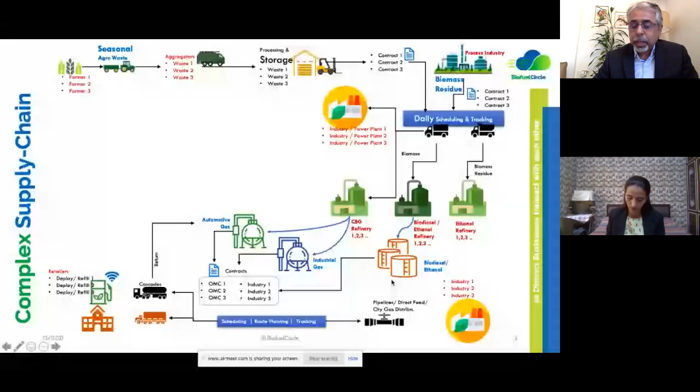The next bit of challenge, which is very interesting, is once again coming out of the so-called biomanure or biofertilizer, which could either be supplied back to fertilizer plants or in a truly circular manner, getting it back to the farmers.

Now, I think the reason I kind of took you through the paces of this supply chain is to look at how many different type of transactions are involved, how many different type of dispatches are involved, how many different type of vehicles come into picture, and how many different participants are there in this supply chain.

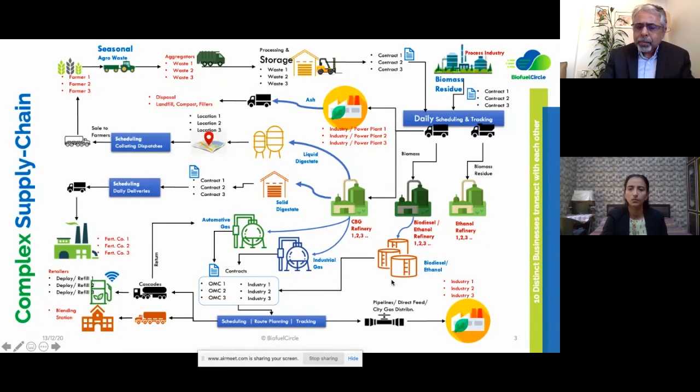Now, if this supply chain has to be run for the potential that everybody is talking about, then it's extremely important to understand what are the problems of this supply chain. And we did a little bit of investigation to find out what are the problems of this supply chain, which seems to be relatively underdeveloped.

The first problem is reach. It is very difficult to reach logistically every small farm in India and to actually aggregate the agri-residue which is available. For biodiesel companies and biogas companies, reaching to their own markets, not only their suppliers but to their customers, is also an interesting challenge to look at.

Of course, seasonality is a problem which results in high cost of storages and interruptions in supply chain as far as biomass is concerned. Price discovery is relatively underdeveloped. On one hand, the farmers do not really get big economic value out of biomass. On the other hand, the industry does pay a price which is at par with what international prices would be.

And last but not the least, the supply chain and the complexity of the supply chain does not allow companies to scale up. I mean, we saw the Abellon presentation a couple of minutes back, and it's a humongous effort to actually make these 8 or 9 plants work.

If they want to scale up, it's extremely important to understand what kind of role digital technology can play in making this supply chain more sophisticated. And that's where one started looking at, and I'm going to skip this slide because this has been covered by the various other speakers from IOCL as well as speakers who spoke before me.

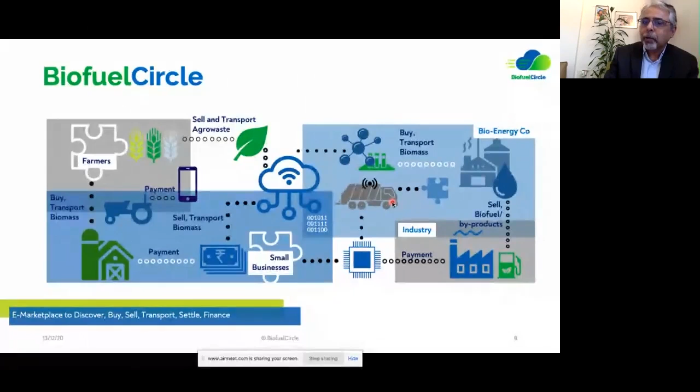I know there's a time restraint here, but I'm sure this technology infusion will create at least some ideas in the minds of companies currently participating in this supply chain, to use technology for achieving not only bioenergy transformation but also digital transformation for this supply chain. If we can do that, I think we'll be able to foster an ecosystem that creates more local jobs around bioenergy, focuses on rural economy, creates scale for green energy, and provides energy security to the nation.

For the participants in the supply chain, Biofuel Circle as a platform would provide advisory on what, when, and with whom, provide visibility for opportunities available to everybody in the supply chain, create low-cost transport alternatives, since transportation in most cases ends up being 20 to 30% of the landed cost of biomass for energy companies, and allow truly transparent price discovery for biomass.

It will enable digital payments for all participants in the supply chain, provide ease of logistics and storage, and more than anything else, supply chain financing at reasonable cost, bringing in financial partners on the platform who can finance transactions that are true and visible in a transparent manner, helping achieve growth for green energy in the country.

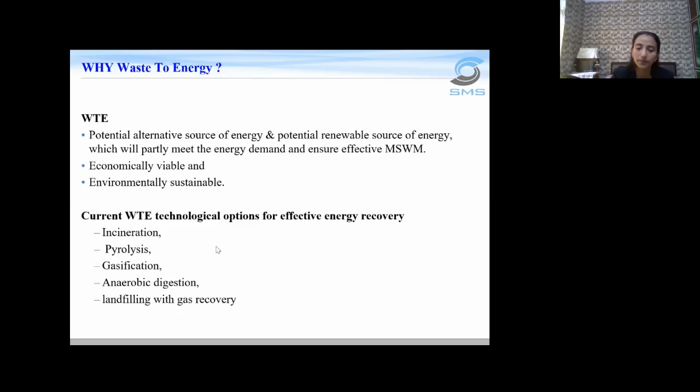Am I audible? Am I audible, Akshay?

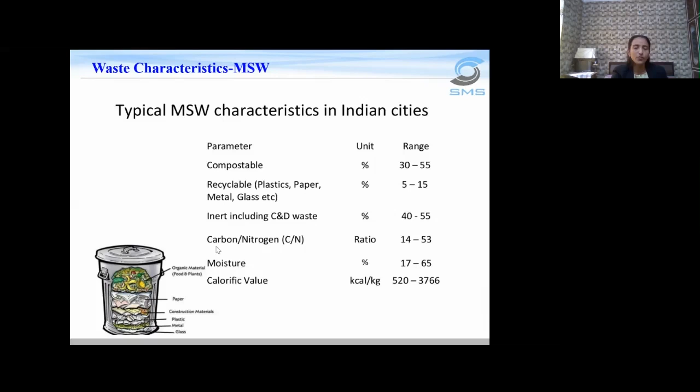She seems to have a connectivity problem. In the meanwhile, till we hear anything from her, we will take questions.